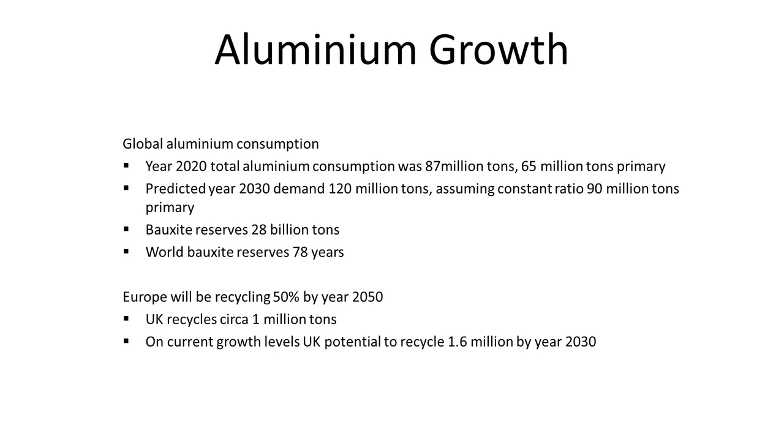That means the whole world is going to recycle more and more. Europe has already said that by 2050, 50% of aluminium will be recycled. In the UK, we only do a token 45,000 to 50,000 tonnes of primary aluminium.

We actually use about 3 million tonnes of aluminium in the whole industry. We recycle very, very roughly in the UK about 800,000 tonnes to 1 million tonnes of aluminium. That number will go up to 1.6 million tonnes.

The reason we know that is because the big growth areas are packaging and automotive. With a 10-year life cycle, it'll be back in by 2030. So we are going to see more and more recycled aluminium.

The bad news is about 1 billion tonnes of aluminium has ever been produced since it started being commercialised. 50% of that is still in its first use. Hence, you can't have green recycled aluminium yet.

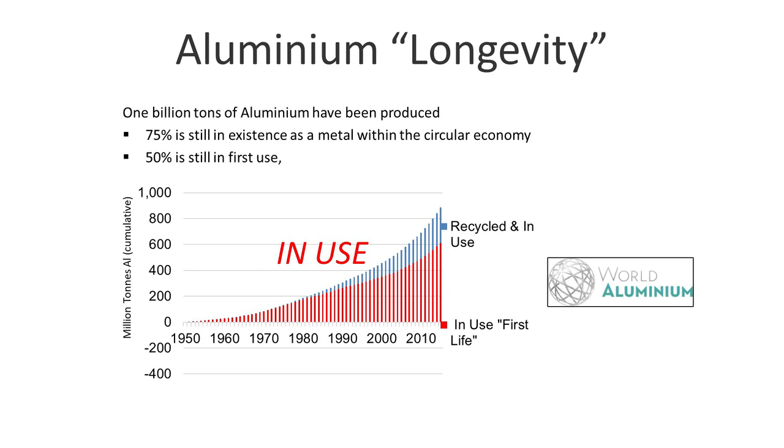75% of it is still in existence. The rest has gone into landfill, plastics, steel. That's unequalled by any other metal. Plastics, by comparison, 90% have gone into landfill.

About 30% of all aluminium goes into construction, and typically you're looking at 75 plus years. That's embedded carbon, that's why we've got 50% still in first use. Realistically, that number's going to go over 100 years, particularly in uncoated aluminium.

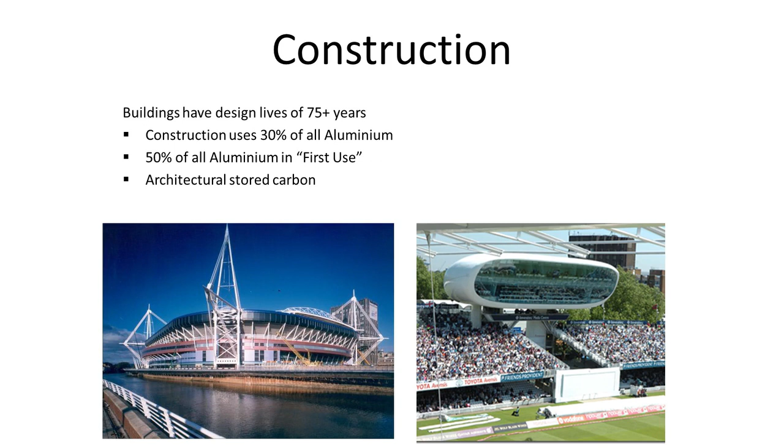It's stored carbon. Now, aluminium is infinitely recycled. It's never consumed, not as long as we're using it in the aluminium industry. And it really is the star of the circular economy.

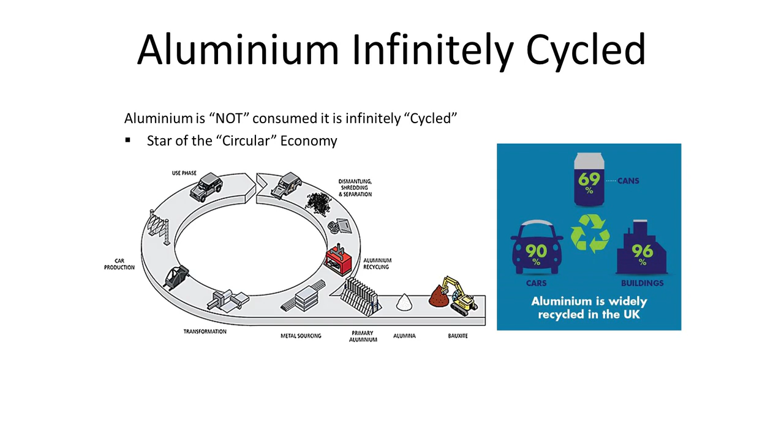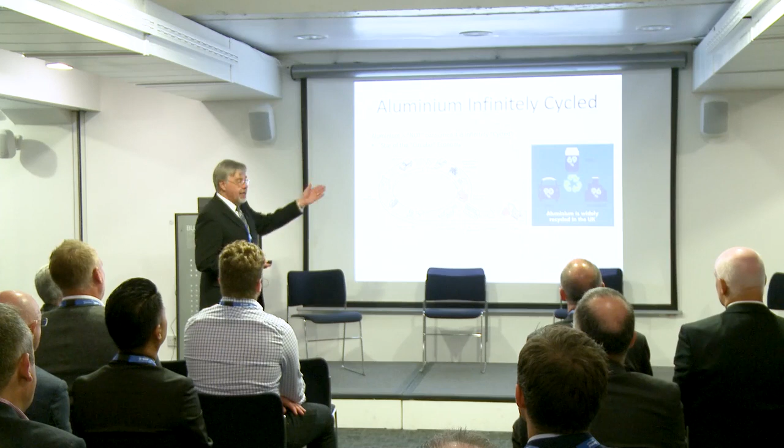In terms of automotive, 90% of that is recycled. In terms of architectural, 96% of it is recycled. We absolutely love buildings because there's a few alloys, big pieces. Packaging is about 70%, and that is going to grow.

But you're going to see that more and more aluminium is going to get recycled. Now, at the moment, because of demand, it cascades down. It starts in high purity, electrical, aerospace, packaging, automotive, extrusions, and at the bottom of the pile are castings.

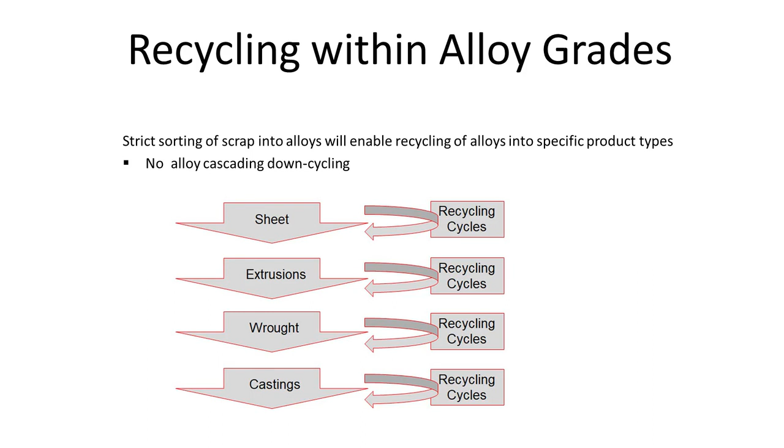The bad news is a huge consumer of castings in the UK is the automotive industry, internal combustion engines. They are phased out by 2030 in the UK. We have lost the bottom step. Now that means two things: more and more aluminium is going to get recycled within the alloy.

Sorting technology exists now that we can sort to a series, 1,000, 2,000, 3,000, but on top of that we can now sort to a grade, like 1050 or 6061. When you do that, all you do is remelt it and you're back in. The problem with that is tramp elements and contamination. So by 2030, we will be recycling within an alloy.

The automotive industry is exploring how to get those alloys contaminated without affecting the properties. Bad news for architecture though. With a car, JLR have already worked on grades, Nissan have already got grades, where they know what the permissible tramp elements are, iron and others, because they've got very short finite lives.

In terms of aluminium, I'll just throw some facts and figures at you. Over steel, we give a typical weight saving of 45%. In terms of concrete, we're about an 80% weight saving over concrete.

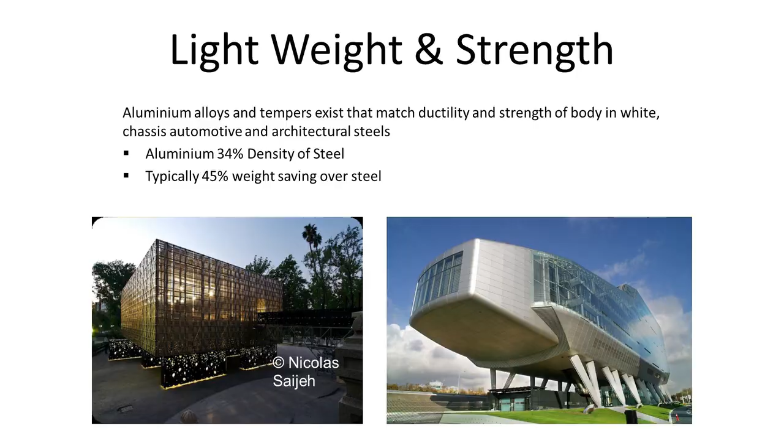Light metal. But that lightness isn't only in the buildings, it's in the transportation, it's in the assembly, in the manufacturing. When you're handling aluminium, your production equipment goes down in scale, lower energy. Not only in weight saving.

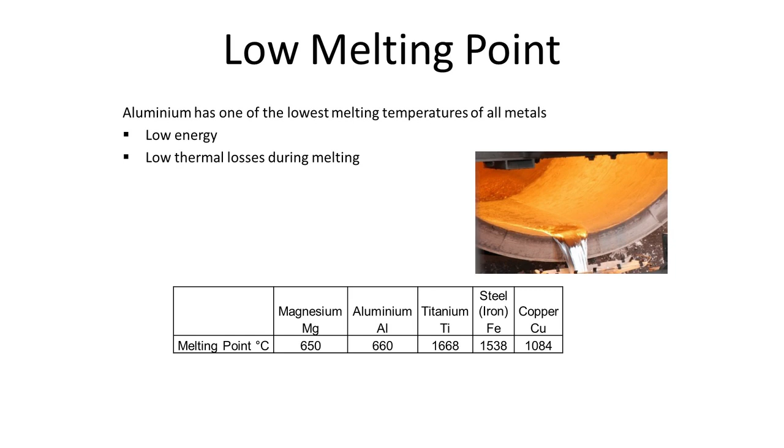It's got a low melting point, 660 degrees C, one of the lowest melting points of all metals. Low energy, simple melting technologies. The early recycling machines were cement mixers, as you do on the site.

One of the things about aluminium is its incredibly high fluidity. The silicon alloys, the casting alloys have got the fluidity of water. Now you can cast intricate shapes.

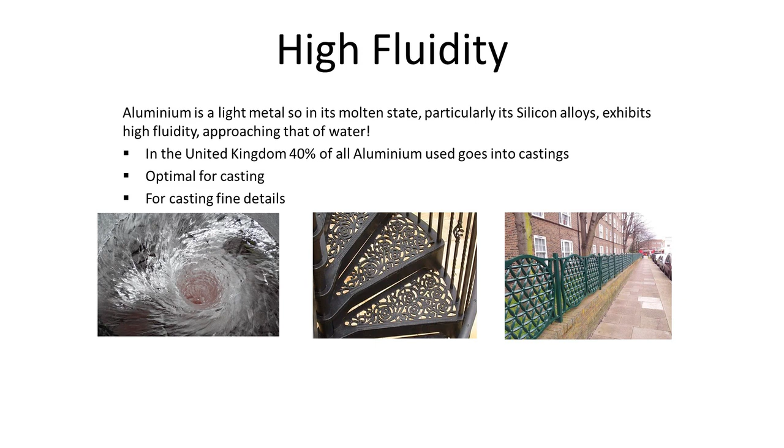It's dominated in architecture, and it's starting to make huge inroads into automotive, more and more castings. The casting alloys being developed today now match the strength of wrought products. Bad news for us, because they're going to bring higher alloys into the recycling.

The one thing that sets aluminium aside is its low melting point - at 550, 500 degrees C it goes super plastic, like squirting toothpaste out of a tube. Now you can extrude it, and when you extrude it, there is almost no limitation to the shape you can produce.

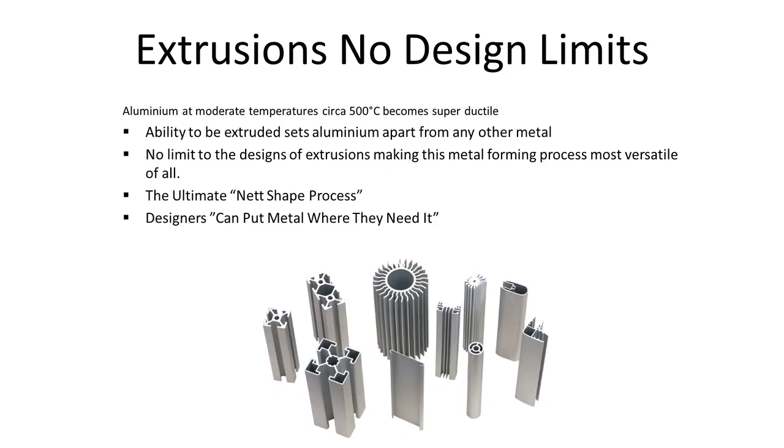The beauty of extrusions is you can make woodworking joints. You don't need to weld them - you make woodworking joints, put glue in there, you've got 100% strength, easy to disassemble at end of life. But extrusion sets aluminium aside from any other metal.

Just an example of a kit build.

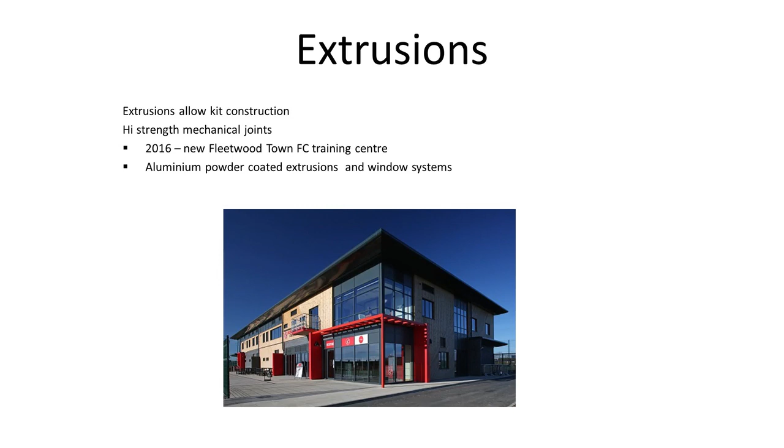At low temperature, aluminium actually gets stronger. Cryogenics - it's dominating cryogenics, it's dominating medical. It gets stronger, but it also gets more ductile, and there's no brittle-ductile transition.

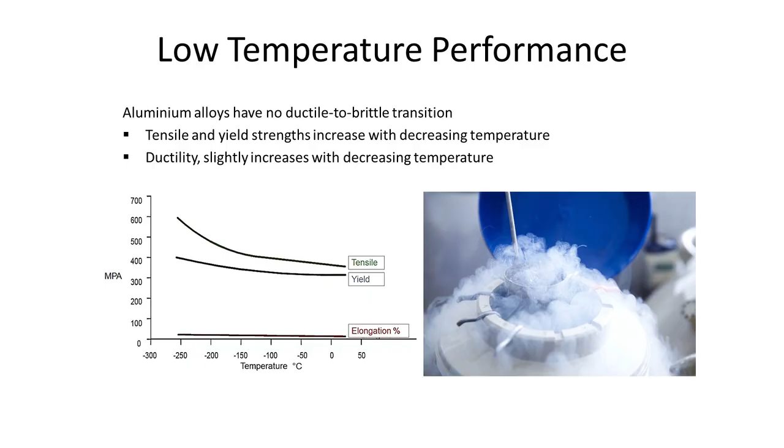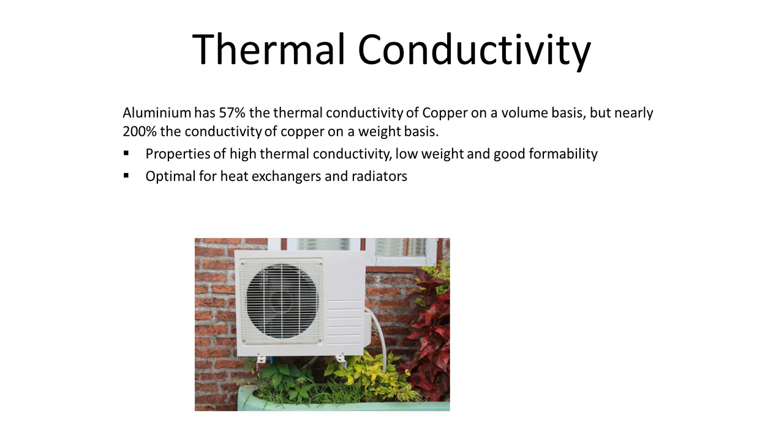It's got incredible thermal conductivity. On a weight-for-weight basis, it's got 200% the conductivity of copper. So it's dominating air conditioning and things like that, but people are now looking at that thermal conductivity in building - underfloor heating, ceiling heating, lightweight aluminium structures.

Radiators. Its electrical conductivity is 200% the weight of copper.

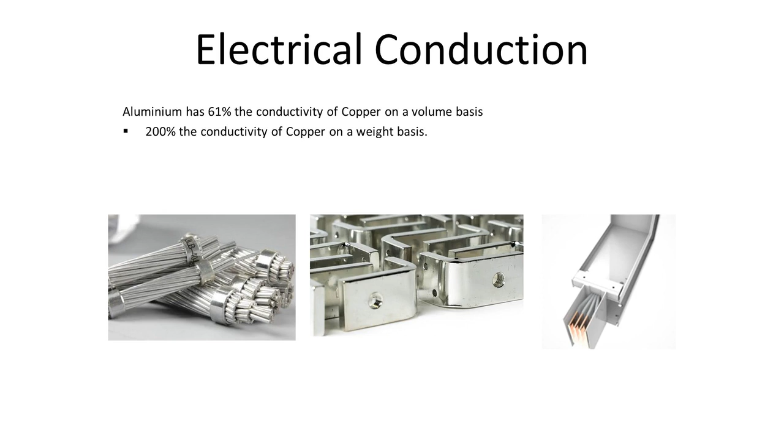The numbers that I always quote: if you swap from copper to aluminium in a C-series car, a large saloon, you take 12 kilograms out. In the States, where aluminium is extensively used, they're taking out about 200 tons of weight out of a building from going from copper to aluminium.

It's non-magnetic. A big important property when you've got lots of semiconductors, chips, computers. Magnetism passes through it like the old schoolboy experiment with iron filings on a piece of paper.

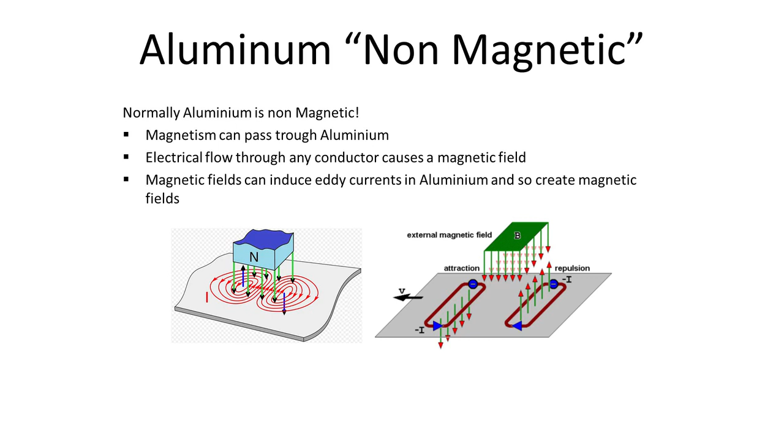It's non-sparking. Aluminium always forms an oxide, so it doesn't spark. It's not going to start a gas fire or something like that.

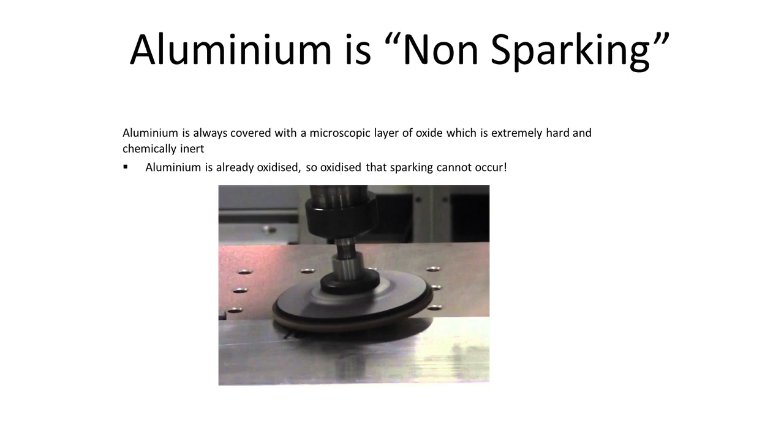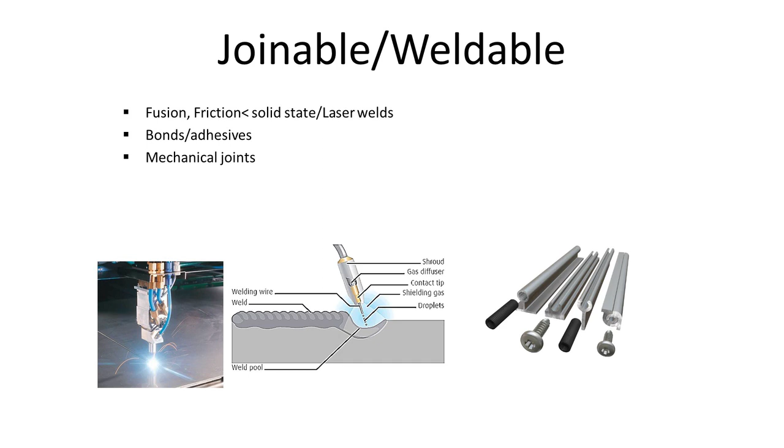Any technique that you can weld or joint is applicable to aluminium - it just needs a little bit of care. But the one I always come back to is extrusions and glue. Cheap, fast, designed, full strength of the structure, and you can do it on site.

Totally impervious to ultraviolet light. That's being used in packaging and stuff, but it's got incredible reflectivity, totally impervious to UV light. As we get hotter and hotter, with more and more sunlight, this is becoming an issue.

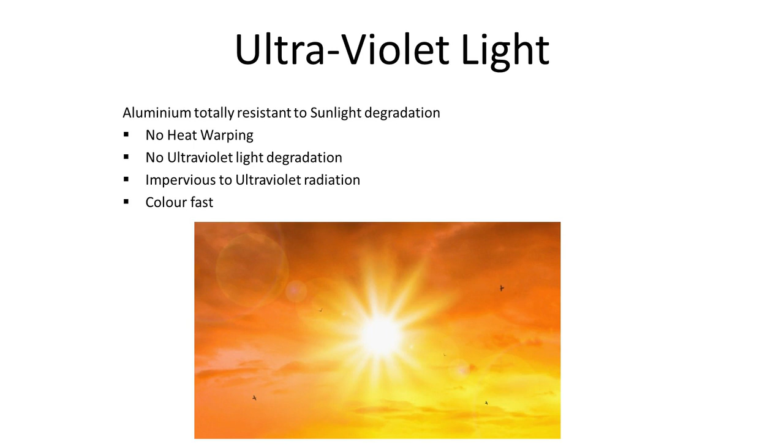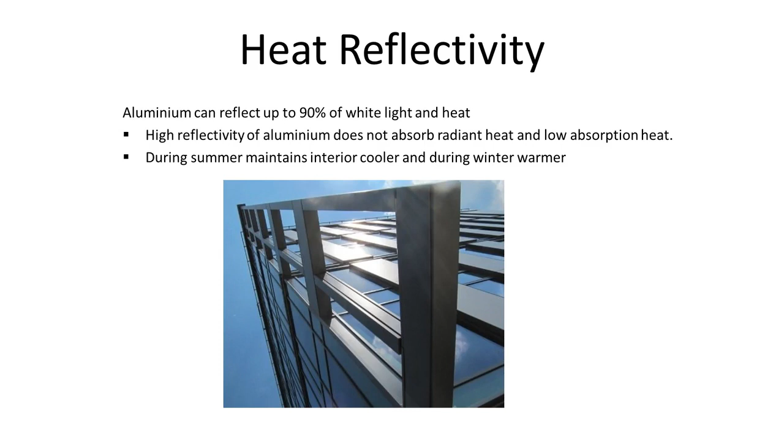Incredible reflectivity - pure aluminium, even tarnished, will reflect 90% of heat and 90% of light. That means it's being used in screens.

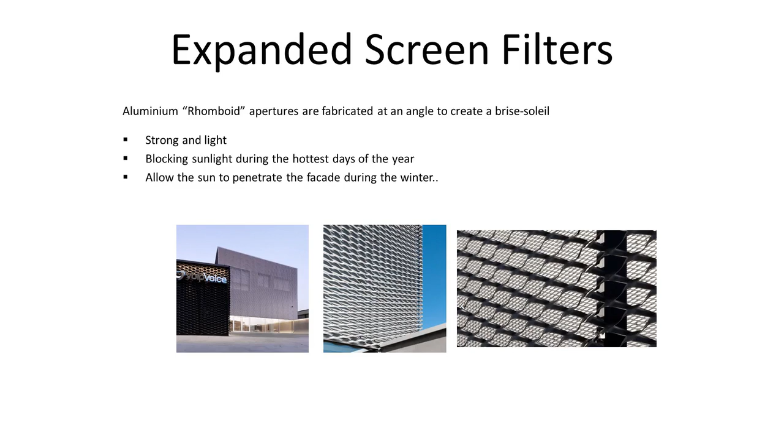Particularly, as Michael will tell you, the beauty of aluminium is you can use the reflectivity to put the light into a building, not the heat.

And the last developments, which Michael's team are using at ULC, are intelligent buildings - buildings that capture the heat during the day whilst keeping the building cool, and warm it up during the night when it's cold, all made possible by aluminium.

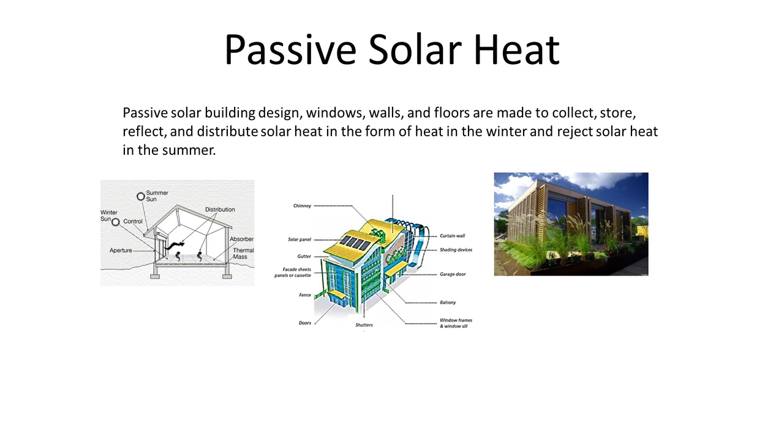And it's soundproof - it's a light metal. It doesn't ring. It's a big sound barrier. It's not like steel, it doesn't ring.

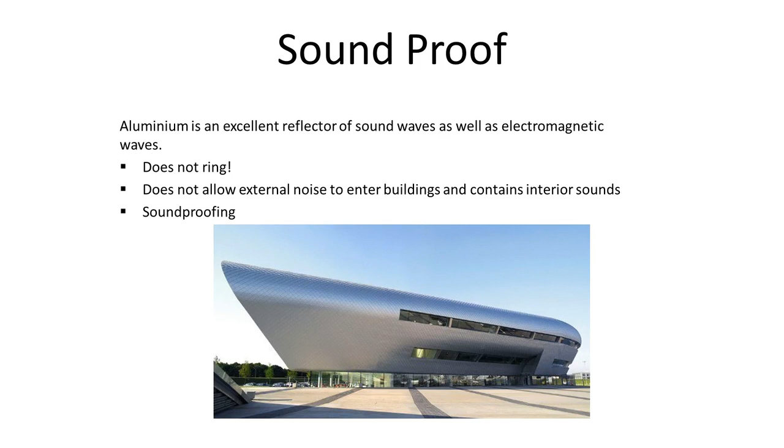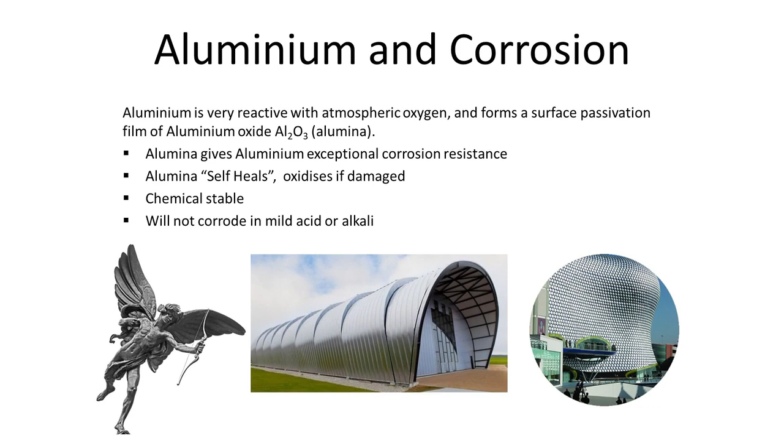I was given 10 minutes.